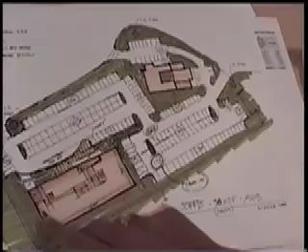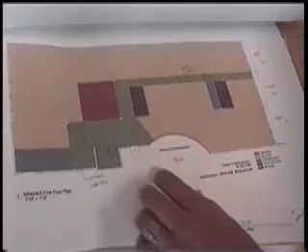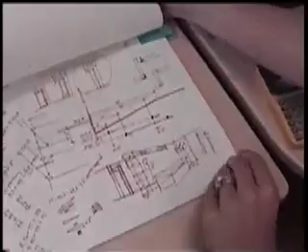And then to figure out how much square footage goes into the building, we have to take a look at the programming. For example, this is a floor plan showing open office area and loading dock areas, building lobby areas, restroom areas. So we need to actually calculate how much space this is to figure out what the size of the building is going to be. This is my sketch paper, and I just leave it on the side of my desk because I take notes all the time and I do little math problems. So every one of these pages has a bunch of little, mostly algebra problems on it.

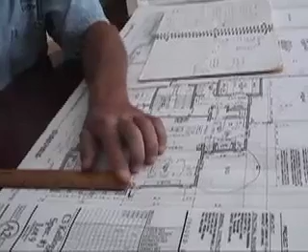I'm Dan. I'm a sheetrocker. People hire me to install sheetrock on the walls and ceilings of their new home. And they ask me to give them an estimate on how much that might cost. So I receive the plan from the contractor or the homeowner, and I have to measure the plan for how many sheets of sheetrock I'm going to need. The plan is on a 1/4-inch scale, so I'll use a ruler or a measuring wheel. And for instance, this wall measures 4 1/4, so that's 17 feet long. It's 1/4 inch for each foot of wall.

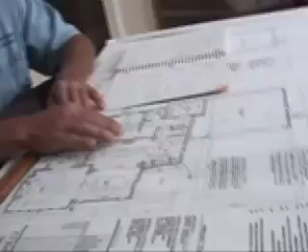So I'll measure the length of the house times the width of the house, and that will give me the ceiling square footage. And then I'll measure all the outside walls, all the perimeter walls, and multiply those by the height of the ceiling. And that gives me the square footage that I need for the walls. And then I'll measure the interior partitions, the walls in between the rooms, and I'll multiply those by the height of the ceiling times 2, which will give me both sides of the interior partitions that I need to sheetrock. I take the total of all that and I divide that by 48 because there's 48 square feet in a sheet of rock. And that tells me how many sheets of rock I'm going to need to install in this house to cover all the walls and ceilings.

Then I take the sheet count and I multiply that, say, by $100, and that will give me the cost of how much it's going to cost me to buy the sheetrock, haul it over there, and install it in the house with the labor and the screws and the glue and stuff that we need to install it. That's the total of my estimate. My installers use fractions to cut and fit the sheetrock that they need for the wall. The measuring guy will yell a measurement to the cutter. I need one that's 32-5 by 47-6, and what that is 32 5/8 by 47 3/4.

Hi, I'm Troy. I'm an actor in New York, and when I get paid, I have to give my agent 10% of the money that I make.

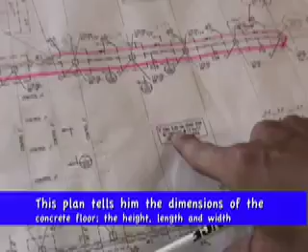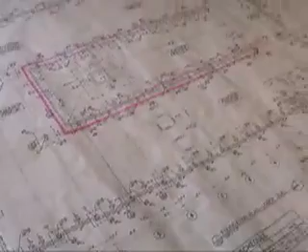My name's Nolan. I'm a construction worker. Right now I'm working on a parking ramp for St. Thomas University in St. Paul, Minnesota. We know that right here, this note says it's a 5-inch concrete slab. So it's 5 inches thick. It's going to be 60 feet wide. And there's going to be 1, 2, 3, 4, 5, 6, 7, 8, 9 bays. And a bay is just a term for an area between 2 columns. So I say 9 bays. And each one of those bays is 22 feet across.

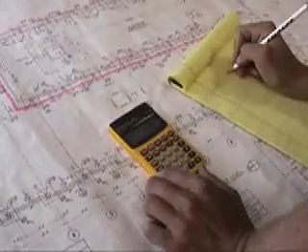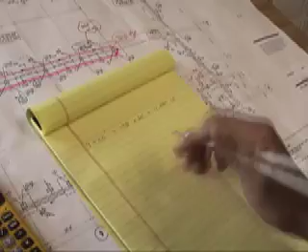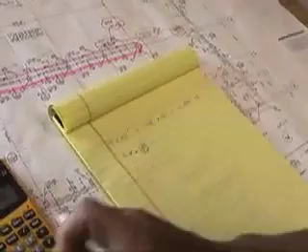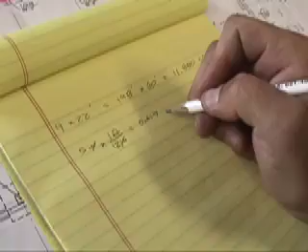So you go 9 times 22 feet is 198 feet, times 60 feet wide is 11,880 square feet. And so we know that we've got a 5-inch thick slab and we need to convert that to feet. So we know that for every 1 foot there's 12 inches. So the inches cancel out and we've got 5 divided by 12, 0.4167. We'll round it to 0.417 feet.

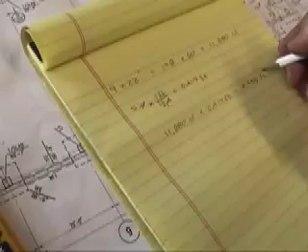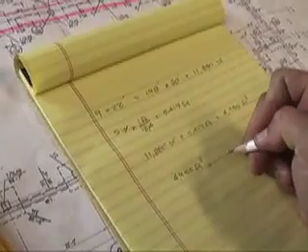Okay. So now we'll take our 11,880 square feet times the thickness, 5 inches. We've got 4,950 cubic feet. But you can't buy concrete in cubic feet, you buy concrete in cubic yards, so we need to convert this to cubic yards. So we'll take our 4,950 cubic feet, and we know for every cubic yard there are 27 cubic feet.

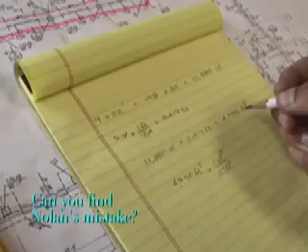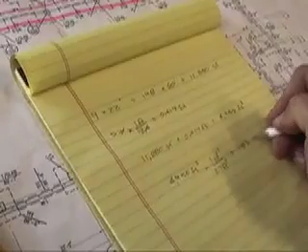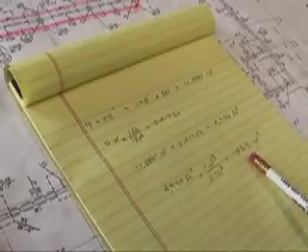So take our number, divide by 27. 183.3. Sorry, those are supposed to be cubed. 183 cubic yards. We'll take this number and we'll round it up. Usually give ourselves a little bit of room for error, so we might order